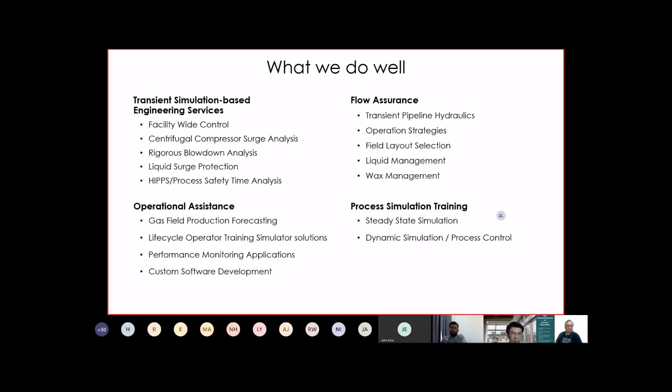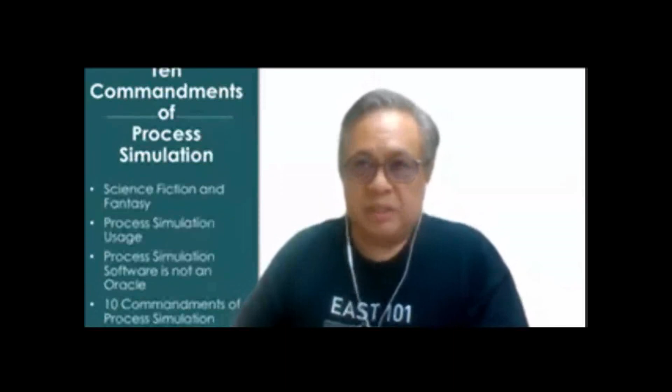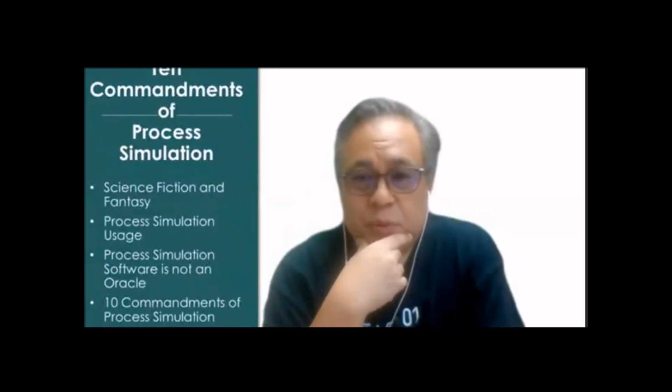Today I'm going to be talking about process simulation, because that's something I've been doing for a while, and that's one of the few things I know how to do reasonably well. I've got a fairly narrow skill set, and that happens to be within process simulation and process engineering. I'll be talking about how we should prepare ourselves before using a process simulation tool or software to design, troubleshoot, or optimize our processes.

I've organized this talk into the following topics. The first is something I'm going to call science fiction and fantasy. I figured all engineers like that.

I'll also be briefly going into some of the typical uses of process simulation, and some of the corresponding software tools used for those particular simulation activities. This will be covered under process simulation usage.

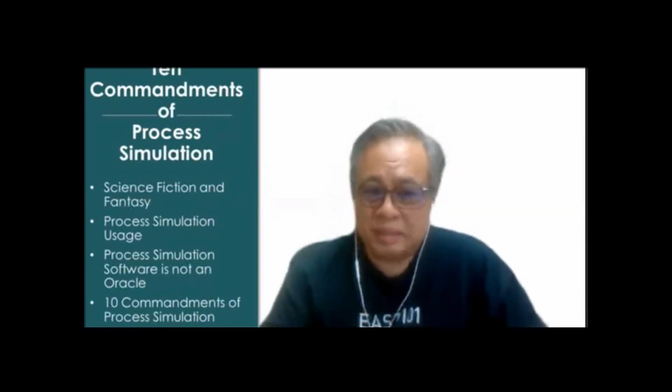After that, I'm going to run through a couple of examples that demonstrate the fact that simulation tools are just tools. Simulation software can't anticipate our concerns. They can't read our minds. They can't understand what we want, and they will definitely not be able to correct for a poor problem definition or lack of engineering understanding.

Simulation software are just tools, just like a screwdriver and a wrench are tools. Saws are just tools used by carpenters and craftsmen to create things. These simulation software applications are just tools, one of the many tools in our kit as engineers that we use for our day-to-day activities.

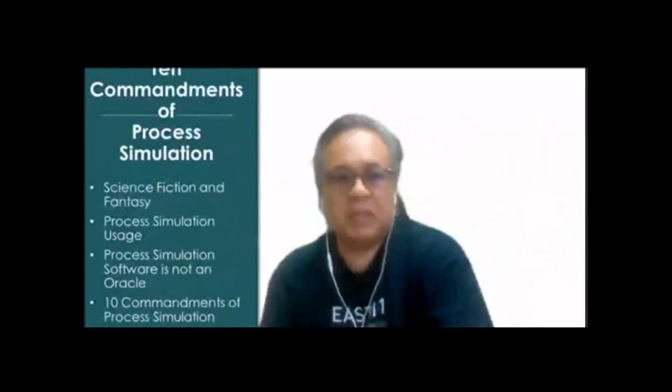One of the things I'd like to point out in this section is that these tools are not oracles. Process simulation software are not oracles. They can't tell us everything about what's going to happen. So after I talk about these particular concerns, I'll go into what I'm calling the 10 commandments of process simulation.

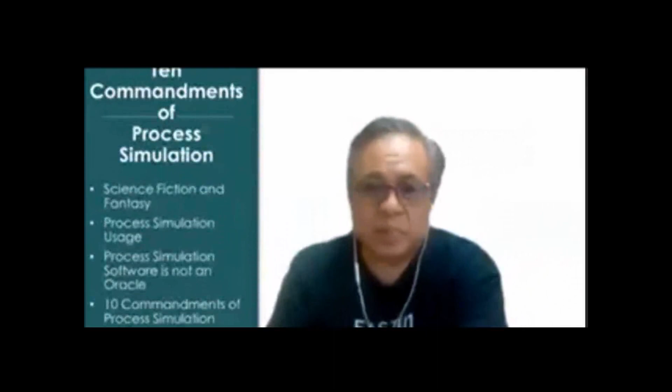So the first thing, as I mentioned, is this topic, which I like to call science fiction and fantasy. The science fiction genre, movies, books, comics, or graphic novels, typically portray computers as intelligent, sentient beings, like HAL 9000, if you're old enough to remember 2001: A Space Odyssey, or more recently, for those of you more inclined towards the Avengers, Ultron, an intelligent machine intelligence.

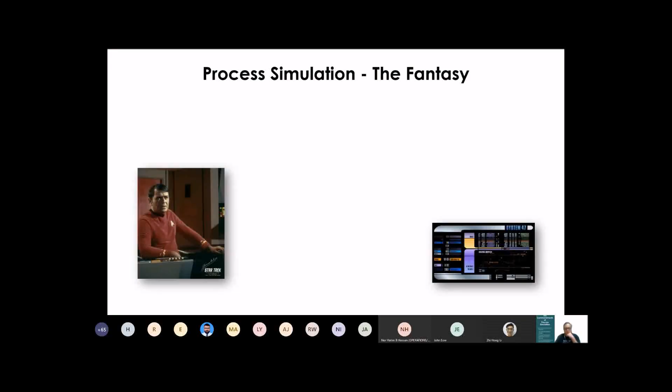Now, if you're 50 or above, you might recognize the guy in this slide. This is Chief Montgomery Scott, the chief engineer of the Enterprise. And in his future, he would just talk to the computer, which is essentially that colorful looking screen. There'd just be a voice interface, and he'd just tell the computer what he wanted.

If this were in a chemical engineering context, he might just say, 'Hey computer, I need to separate propane from 13 tons of NGL liquids. I want a liquid propane product at the top.' The computer would just click and whir as they depicted computers back in those days, and say, 'You're going to need a column a little under 2 meters in diameter, 1.65 to 1.7 meters. I'm recommending 20 valve trays so you can turn down properly. This is your condenser, I'm going to recommend a particular condenser, maybe a chilled water or cooled water condenser with this duty.' And being in Star Trek, they'll actually be able to fabricate that column.

So sometimes people have an image that the computer is going to be able to solve problems for them. Again, I like to stress that these software applications are just tools, just like a spreadsheet is a tool. And the spreadsheet won't make someone an accountant. You need to fill it in, put in the correct rules and math, set up your problem, and interpret it correctly. So this is one of the fantasies we sometimes have about these computers.

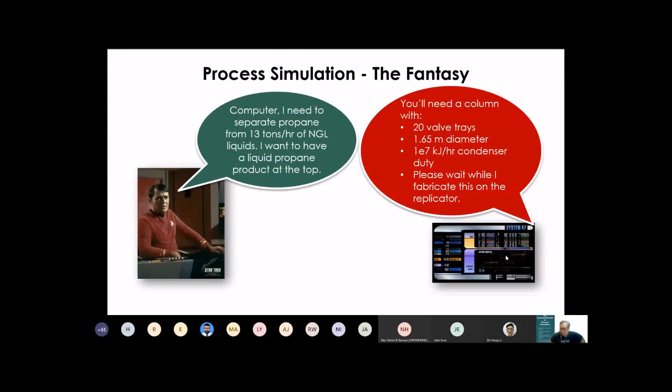Now, before I set up this company, I used to work for a couple of software outfits. And one such company was called Hyprotech, and they wrote software.

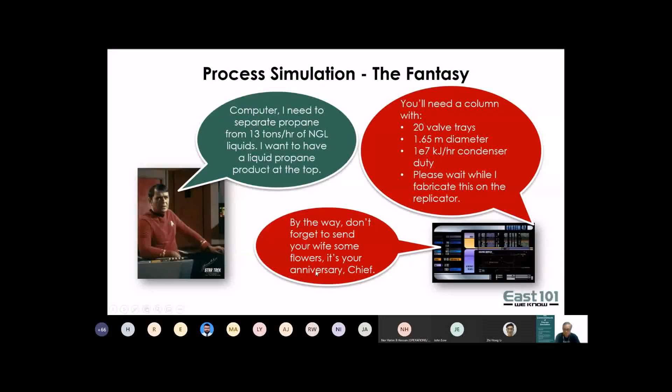And one of the software applications they wrote was HYSYS. So, when I was working in this company, I started off as a graduate engineer working in tech support. So I'd be on the phone support, the guy that answers all of your calls.

And this is an actual call that I had gotten, and it goes like this. I pick up the phone and say, 'Hey, how you doing? You reach tech support.' And I would get a typical response, one I get a lot these days too when I'm teaching simulation classes: 'Your software doesn't work. Got problem?'

And I'd respond, 'I'm really sorry to hear that, but what kind of problem are you encountering?' And the problem we're seeing is my senior engineer inputs some bad data into the simulator, and it calculates and produces bad results. This is when I'd start reaching for the Panadol and painkillers, because I know this is going to be a long call.

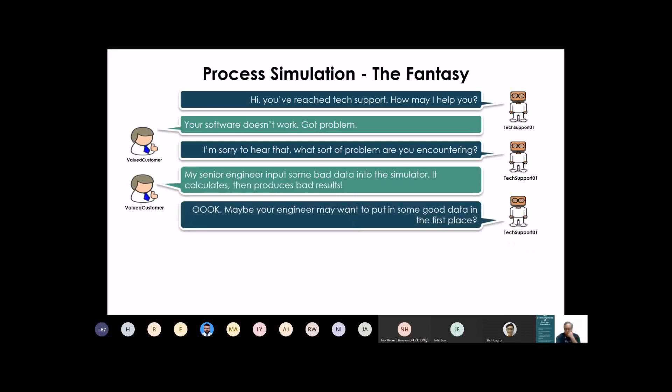And why wouldn't your engineer want to put good data in the first place? Sometimes the response I get is, 'Are you implying that my engineer is dumb? He's got a PhD. Why doesn't the software just tell him what information he needs to input?' And I'm thinking, if the software could do that, wouldn't that put him out of a job?

So we go to engineering school for 4 years for a particular reason, and it's not to input data into simulation software tools. There's quite a bit of thought that needs to go on when we're setting up a case, setting up our analysis, setting up our computation, and setting up a simulation environment to address this.

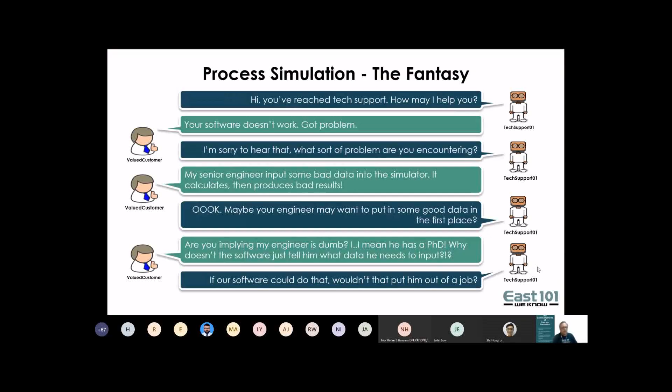And you've got that age-old saying, garbage in, garbage out. So you need to be careful about what information you feed into your software application, your tool, or your spreadsheet. You need to make sure things are properly defined and well prepared.

The data that you put in needs to be validated data. If you're taking a look at information from your data historian, you want to make sure the instruments are properly calibrated and the instruments are on.

The first thing that happens is you typically come up with a new opportunity. With this new opportunity, you generally have to conduct some form of feasibility studies or conceptual design to come up with perhaps some pre-FEED type detail. Once you've done some conceptual design and concept selection, you generally go through some kind of basic engineering or front-end engineering design, where you'd be looking at equipment sizing.

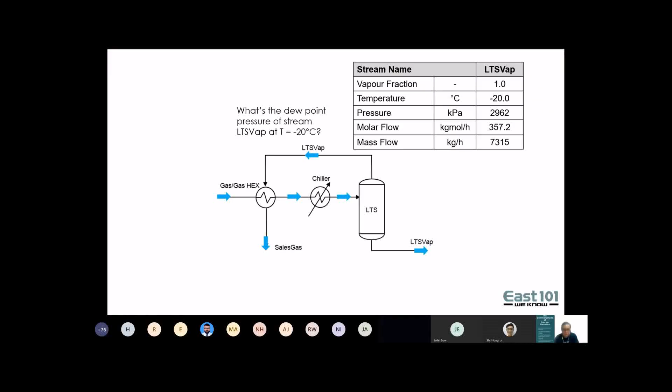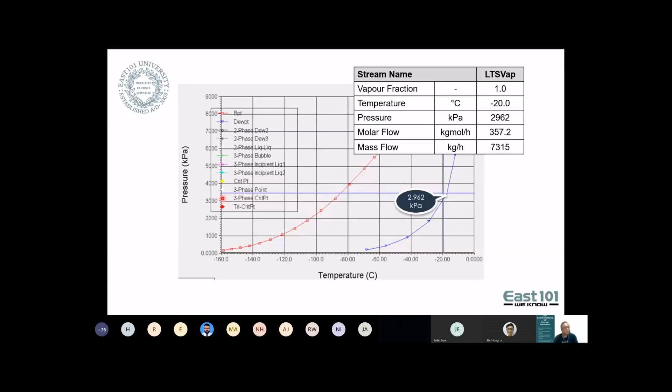If I take a look at the entire phase envelope, I actually have two dew point pressures, one at 30 bar, and this other dew point pressure, which is at 80 bar.

Now, I see this because my phase envelope has this rather strange behavior. Yeah, I have this bulge, and this bulge is what we call the retrograde region. So I actually end up having two dew points. I've got, this is what I might refer to as a dew point, and this point over here is what I might refer to as a retrograde dew point.

So if you really want to take a look at your fluid, it's really important not just to do the flash calculation in the simulation tool, but you need to also go and plot your phase envelope.

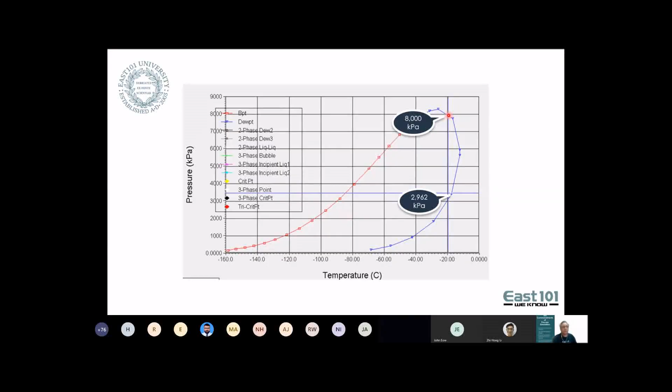So this is another problem that I typically get. My distillation cannot converge. I think if I had one ringgit for every time I heard someone say this, I'd be extremely rich. I wouldn't have to work. My distillation column cannot converge.

So what do? I set it up, and then what happened when it didn't converge? I press reset and then I run. I press reset and then I run, and it still doesn't converge. And then what happens? Then I'll change the specs.

Reflux ratio, and then overhead propane fraction, overhead propane mole frac, yeah? So it's a depropanizer. I'm essentially taking out propane in the overhead, and I have the heavier components, butane plus, coming out as a liquid product.

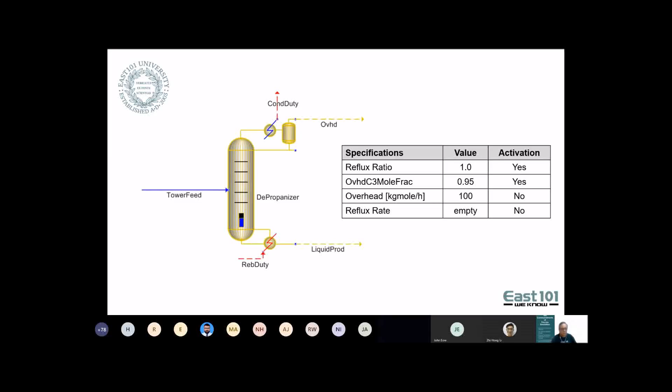So over here in this page, I have the material balance, and this is just a simple case over here. So I'm putting things in kilogram moles. So my feed, I have methane, ethane, all the way up to normal butane, and this is my composition.

Now, the first thing that I do before I start the simulation is I'm just going to do a very simple material balance. It's a depropanizer, so my propane is going to go at the top, and my butanes plus are going to come down the bottom. So I'm just going to draw a line between that and say, okay, propane go at the top, butanes go down the bottom.

Now, and I know what you're thinking. If you're still in school, and I noticed some of our old interns logged in over here. So some of our interns are going to be saying, because they've just sat for the distillation class, they're going to say, hey, Rafil, that's not going to happen. You're not going to get a perfect separation there.

You're going to get some light key going in the bottom and some heavy key going on the top. You absolutely will, but in this case, just humor me. Just draw a straight line between your propane and isobutane. Notice I've also arranged these components with regard to the boiling points.

So I'm just doing a simple material balance, something I could use a calculator and a pencil for. After I've done this, I calculate everything that's going to the top and everything that's going to the bottom. So I have a total feed coming in of 141 kilogram moles, 105 going over the top, 35 coming in the bottom. I can also take these component flow rates and convert them into mole fractions.

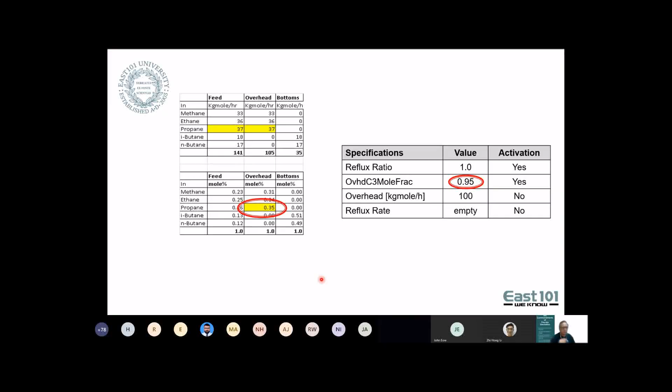So it's absolutely imperative to run a quick material balance before starting to do any kind of specification for your column. If any of you have been in my distillation class, you'll see that I do something step by step. If you've watched me troubleshooting a distillation problem, the first thing I do is a material balance, something like this—figure out what goes on the bottom, what goes to the top—and then I would look at performing a quick flash calculation to estimate temperatures.

So it's absolutely imperative before we do anything, do material balance first so we know what's going to happen. In a situation like this, putting a 0.95 mole fraction spec when you can only get 0.35 mole fraction is not feasible. Maybe the spec for this should have been recovery, 95% recovery of propane at the top. Again, this is just an easy thing that could be very easily flagged if you did a material balance first.

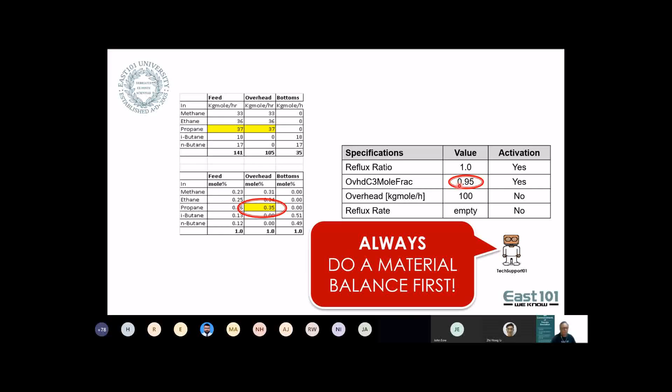Okay, so now what I'd like to do is go through what I call these 10 commandments of process simulation. Number one, the first recommendation I'd like to make is: before you start your simulation, before you start firing up your software tool, before you're going out placing an order for software, the first thing you need to do is understand your objective and define your objective. What is it you want to do? Are you having a hydraulic problem in your distillation column?

Or are you having a problem with your control system in your distillation column? Are you having some problems with compressor controls? Are you surging a lot? Are you finding that you're getting a lot of slugging in your pipeline? Because you need to identify an objective. The reason for that is there's not one single mathematical model or physics model that can represent the behavior of all fluids and all processes.

You're going to need to use various tools. That's why earlier in the slides I was talking about process flow sheeting tools like HYSYS, Unisim, Symmetry, and flow assurance tools like Olga, LedaFlow, or other applications. Depending on the type of computation you want, the objective is going to determine the kind of computation that you're going to need. You need to be able to identify that correctly.

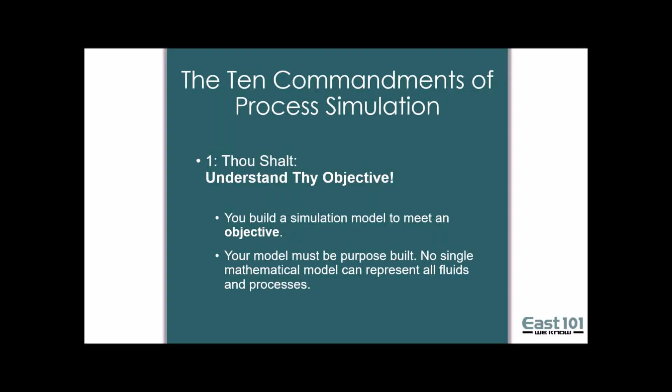The next thing we're going to look at, second point—hold on a sec. The second thing I'd like to recommend is identify your system or process. Now, I always recommend sketching your process out by hand. Now we work with a lot of PFDs, P&IDs, PFSs, different kinds of drawings, and we need to convert them.

We're using the information from the drawings to build our simulation models. Now some of these drawings tend to be rather complex, and in some cases, if I'm building a steady state simulation model, I may not need to model certain bypass lines, recycle lines, or drains. So it's really important to first identify the system or process you want and sketch it out. I recommend sketching it out by hand, though I guess these days you could either sketch it out by hand or use any kind of drawing tool. I see a lot of people using Microsoft Visio for these kinds of things.

I think also by sketching things out by hand, you also get very familiar with the processes quickly. The next thing I recommend is to draw an envelope around your system, identifying all the incoming and outgoing material and energy streams.

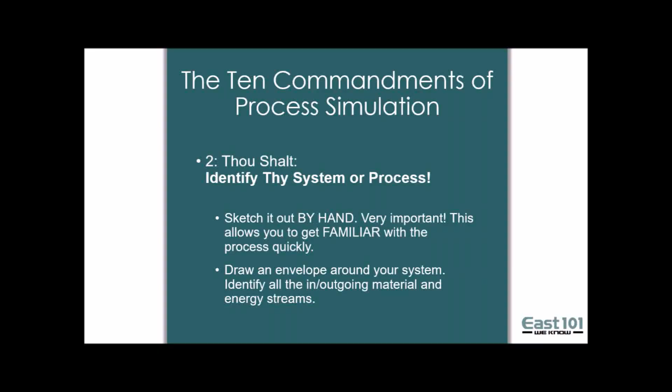The next thing, number 3, it's really important to imagine what's going on physically. Most engineers and scientists need to have really great imaginations. You need to be able to describe the mechanisms behind the systems or phenomena you're studying, even more so when doing chemical engineering type problems.

In some cases, you might be looking at systems like azeotropes. How do you imagine an azeotrope? If you have a high boiler, where a heavier component boils off before a lighter component, why does that happen? One of the images I have for a phenomenon like that is that the heavier component might be a certain size molecule, while the lighter components might be smaller.

However, under certain conditions, we might have things like hydrogen bonds or some form of attraction causing these smaller molecules to clump up and form pseudo molecules. These clumps may be bigger in size than your heavier component. Therefore, at certain conditions, your heavier component may tend to boil faster, while these smaller components are in some kind of clump state due to the hydrogen bonds. So these are just cartoon images I sometimes use to help visualize what might be going on.

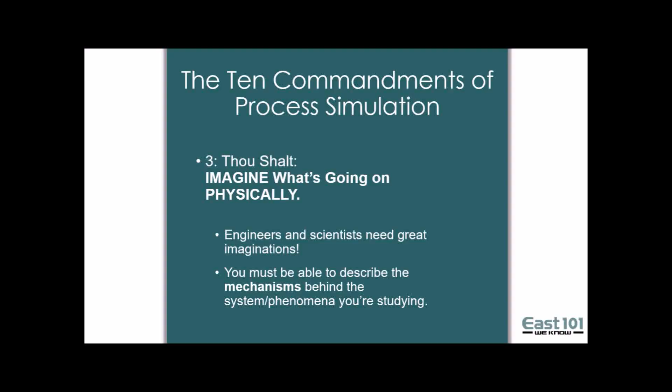Okay, the fourth thing we need to look at is, once we've taken a look at the type of phenomena we're studying, it's really important to figure out what kind of physics or mathematical model we need. So if you take a look at a typical chemical engineering curriculum, we've got thermodynamics, transport phenomena, reaction engineering, process controls, and economics. All of these subjects come with some form of physics or mathematical model. It's important for us to understand the kind of phenomena we're studying and what kind of underlying physics models we need.

Now, if I'm looking at a distillation column and using a flow sheeting tool like Symmetry, Unisim, HYSYS, or Petrosim, these tools essentially look at distillation columns from a thermodynamic perspective - vapor-liquid equilibrium. You'd specify, and they perform heat and mass energy balances around your column. The impact of mass transfer in general is not taken into account. You do have some specialty columns with mass transfer, but these aren't commonly used. Most columns you'll encounter in oil and gas work are generally equilibrium columns - they're not taking into account mass transfer effects, meaning you need to compensate by looking at efficiencies and tray efficiencies.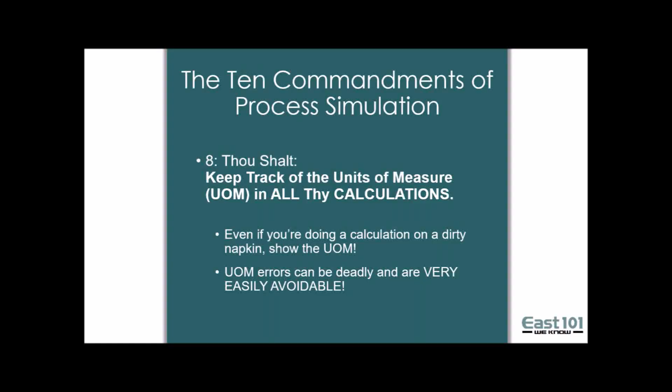So what we typically do before actually running a simulation is a hand calc first, a simple heat and material balance. Or sometimes, if you look on the internet, you can actually buy very cost-effective flash routines, like the National Institute of Standards. They have something called RefProp, and I think it's about $200 US or less for a flash engine.

So you can use that to do simple heat and material balances, flash calculations. Even if you didn't have something like that, you can just use Antoine vapor pressure correlations to look at vapor pressures and do simple flash calculations. So it's important, before doing something very complex, or even before investing in and buying a tool, to just do a simple heat and material balance first.

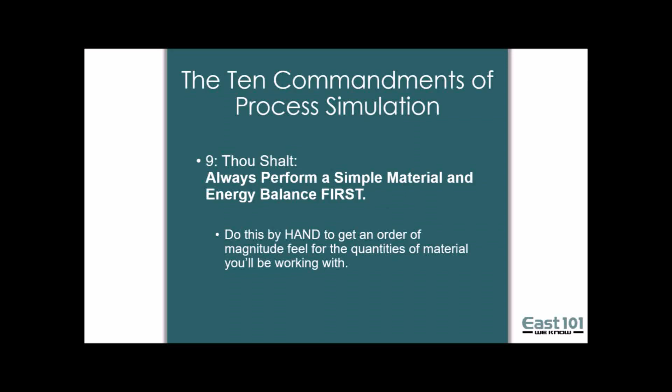It's really critical to plot your phase envelope. I think if you go to a lot of the chemical engineers, some of the senior engineers, guys in their 50s or 60s, you walk over to their cubicles or offices, and you'll definitely see a phase envelope stuck up or pinned up.

The important thing is, when you want to work with a fluid, you can't always know what's going to happen if you're just looking at a PFD or a P&ID. You want to know how the phase is going to change across your process.

So if I'm looking at, say, a compression train, I want to make sure that the suction to the compressors is going to be all vapor - no liquid in the compressor suction. If I'm looking at a pump system, I want to make sure that the liquid feeding into the pump is a subcooled liquid. So if I had a phase envelope, I can actually see where in the phase envelope this fluid would lie based on the temperature and pressure. That's absolutely critical.

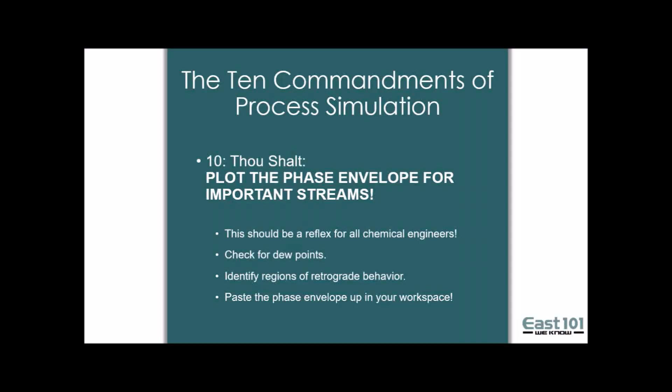So that brings me to the end of my talk. We've gone through some of the common simulation practices and some of the common pitfalls that we would typically encounter.